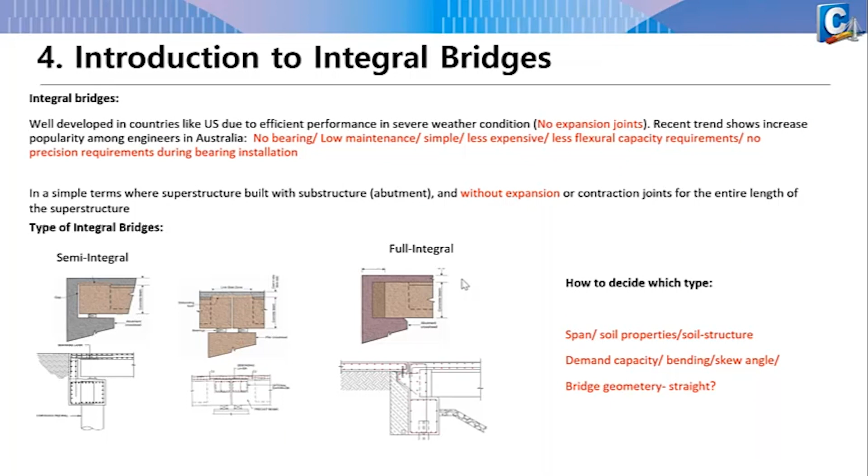And as I explained, provision for thermal movement should be made out of the deck, so there are no expansion joints. As you can see in this figure, for thermal movement joints, the acceptable practice in Australia, basically in Victoria, is to have the joints out of the deck. So it's after the approach slab, between the approach slab and road slab. That's the location which usually can have movement joints.

This is a requirement based on some guidelines. 70 meters is the maximum you can go for concrete. But if I have 70 meters, usually I won't go with the plank. Of course, we go with different types of girders. We can go with the Mega T or the SPGs, but we are not talking about that in this webinar.

And it is very important that you don't have huge thermal cycling movements if you are using fully integral bridges, which means this 20 mm maximum, minus and plus 20, is given in the guidelines, but it's not a must as long as you can accommodate it. But this is a limit to have in your design assumptions, because due to the cyclic movements, you will get different passive and active pressure from the soil, induced from the thermal cyclic displacements.

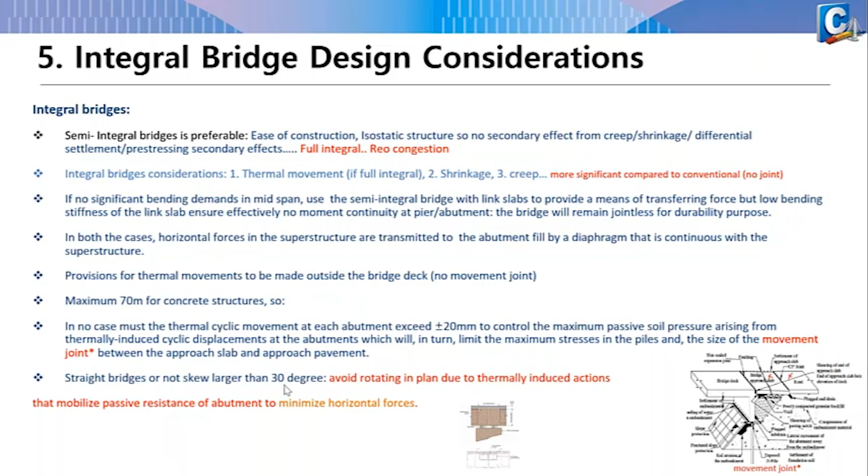So, in summary, when we do a bridge conceptual design, there are factors to pick the solution. Usually in the tender phase, clients ask you to come up with 2-3 solutions before going to the preliminary design. If it's a small project, you do 2-3 options. If it's a big project, probably you do a reference design.

So in the conceptual design, usually you look at the roads: what are the skew degrees and geometry of the roads, the environment, the climate condition there, and also, very important, the soil profile and soil specification.

So the soil profile is one of the key factors. If you have very different soil profiles in two different locations, left and right abutment, south and north abutment, you really get big issues with potential differential settlements from left to right, from the north to south abutments. So you don't want that. Then you should really avoid full integral bridges, and going with the determinate structure is the best option there.

And also the bridge span, as we touched base on, and also the project delivery time in terms of construction time, and then material, and also site constraints. Sometimes you don't have mobilization. What's the traffic there? Do you need a road closure, or what's the maximum span you can close? All of those factors, and then also construction sequencing.

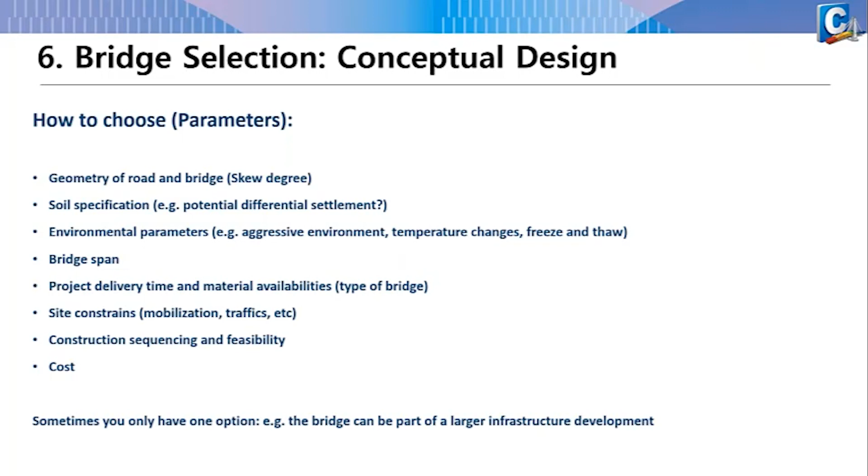So a quick introduction to the project. Now I touched base on the factors in the design phase. So here is the North East Link project, which is basically the biggest Victoria, Melbourne roads infrastructure project. This project is going to deliver twin road tunnels in Melbourne, and a dedicated busway, the first dedicated busway as well. There is going to be 34 kilometers of walking and cycling paths over 16 suburbs.

Our group has been, and is still, undertaking the design of two underground interchanges, cut and cover D-walls, and ramps, which are at Lower Plenty Road interchange and Manningham Road. You can see some of our design phase, which has been completed, and in the next year we finish the CPS phase as well.

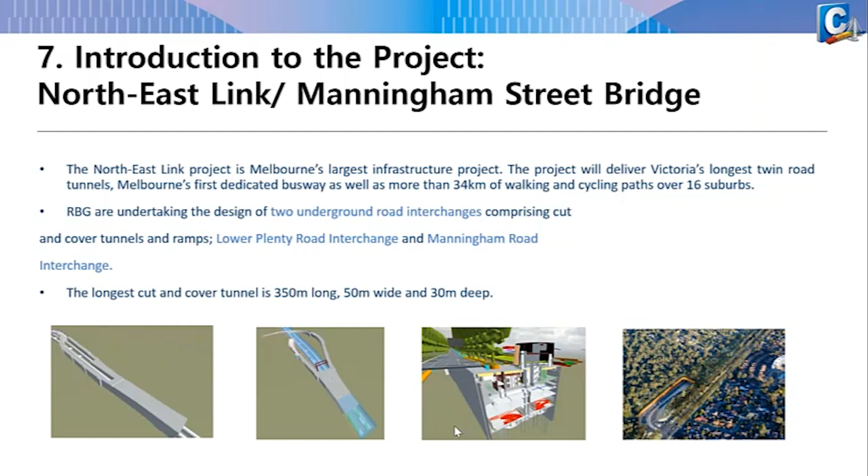So the longest cut and cover tunnel for us was 350 meters long, 50 meters wide and 30 meters deep, with precast vaults. In one of these interchanges, Manningham Road, which you see in the next slide, we have cut and cover, and over the cut and cover walls we had to create a bridge at Bridge Street. And we will talk about that.

Here I'm going to discuss why we decided to go with full integral bridges and why we didn't go with semi-integral bridges. First, we checked the angles. We have probably 15 to 16 degree skew angles, and the 20 meter span perfectly fits integral bridges. And we have a cut and cover D-wall, which has a huge stiffness and creates proper support bedding and abutments for the superstructure, and that can easily transfer bending moments.

We didn't need to worry about the forces at each side of the abutment, so we could reduce the depth of the beam. And also, because there is a road at both side abutments, we needed to keep the finish level of the bridge at a certain road level. So we had no option but to keep that level, and we couldn't change the depth of the beam. So definitely we want to minimize the demand bending moments at midspan.

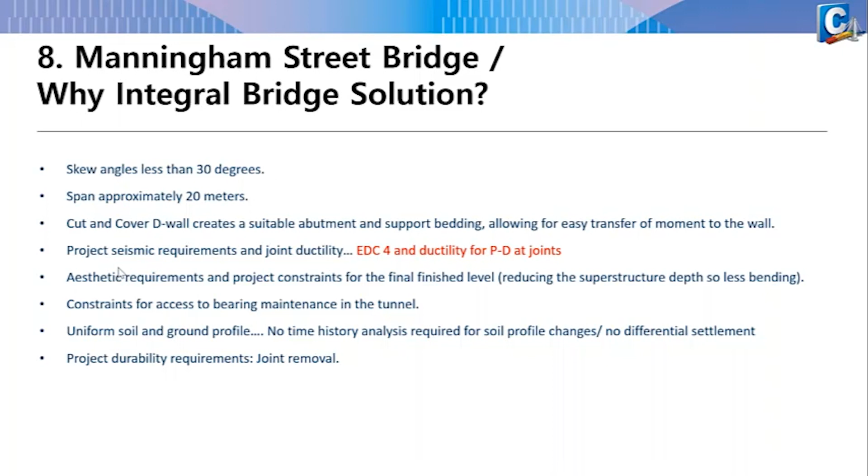You can see in the next slide, that's basically the bridge we are talking about, and it is in the Manningham Bridge Street intersection, and it has 30 meters width, which had 10 lanes, if I'm not mistaken. And in the plan, we have some skew angles. In the vertical angles, we have some angles as well.

And this is basically a cut and cover wall. And that is the approach slab. We designed the approach slab based on requirements, and also the joints happen after the approach slab, as discussed earlier. Basically, this is the solution we adopted. This is a standard plank. Probably most of you are familiar with that.

Usually in Australia, it's very popular to use Super Ts for a longer, like a 30-35 meter span, or like 40 meter max. I think 34-35 meters max for Super T, if you want to go with a standard T1 to T4. And if you have sections with lengths like 12 to 18, 19, 20 meters, if I'm not mistaken, these planks, pre-stressed planks, are super handy.

So you basically have stressed tendons, top and bottom, and they're typical. And you can simply design it, and then also you can decide on the debonding. What is the debonding? Here we used 20 strands, and we needed 2 extra strands and top strands for negative bending moment, and also we needed to create debondings to make sure we don't exceed the compressive and tension stresses in each stage in the construction staging.

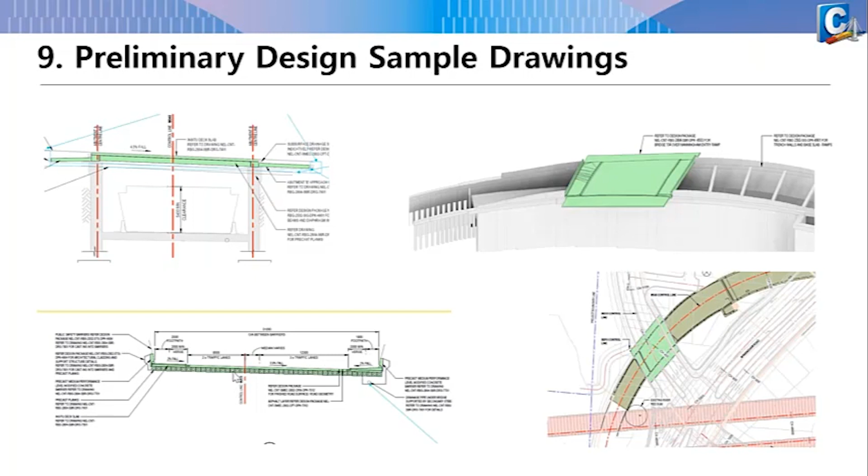So a diaphragm, as you know, creates lateral stability, and the more important factor from a diaphragm is that you get a proper, even vertical load distribution between all your girders. So the diaphragm has a very important role in integral bridge design, and any bridge. So here we basically filled in with grout at the end of the span each side to make sure everything is fully restrained laterally and also create a proper diaphragm.

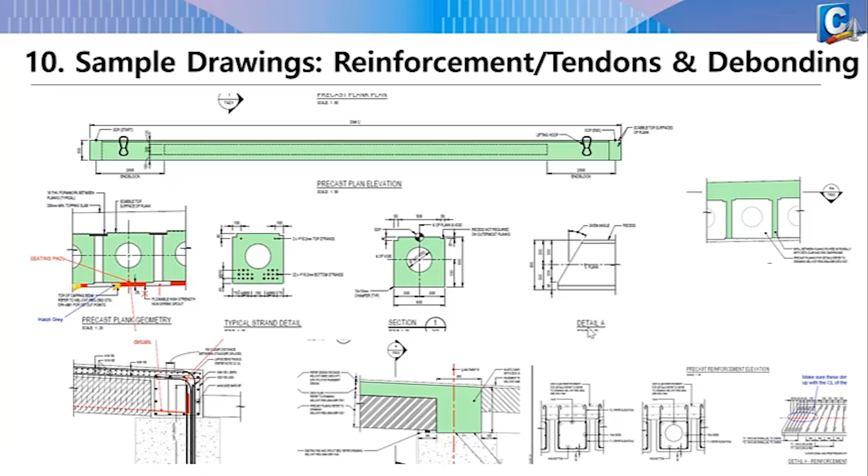So for Midas modeling, now I'm going to highlight the main items in Midas modeling which we used and you can use. I'm very happy with using the Wizard. Usually I use it if I want to do a super straightforward solution, a reference design, or a concept design. It's very easy, fast, everything is ready. In an hour you have your bridge model ready for 1, 2, even 3 spans, and then you can tweak it if you want.

But if the structure is very complex and you need to change everything, then maybe it's not worth it, and you can start modeling from scratch, which is going to be time consuming, but of course there are fewer errors, and you have everything under control. I'm not going to go into detail on how to model that. There are tons of tutorials available, but I'm just talking about what options we have.

And option 3 is basically import. This is my favorite one when I have a properly complicated geometry. And another trick is importing in 2 steps, like what I did for this project. We had the initial concept design in another software. In the detailed design, we really needed to do more sophisticated analysis, and that's why we exported to CAD, and from CAD imported to Midas.

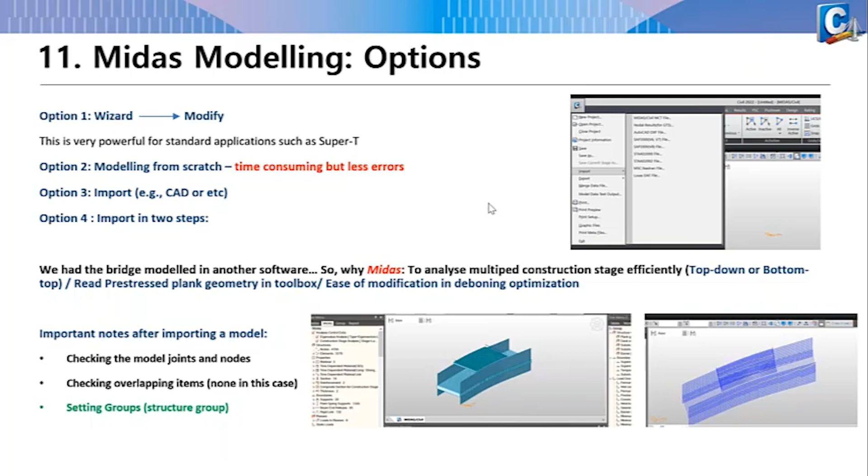You need to create a setting before doing anything. When you import your model, first you start working on creating groups, on structure, on the elements.

And the question is, if we have the bridge model in another software, why did we use Midas? To me, it's very simple. Different software should eventually give you the same result. But we had a very specific case, and it was very interesting and challenging at the time of design. The client was not sure what the construction methodology was. Is it top down or bottom up? That can change the whole design scenario.

So that's why: it's very user friendly in terms of having your construction stages in Midas. That is, I think, the strongest point of the Midas application to me, the construction stage. You can define your construction stages, tweak them, change them, and then have different scenarios. You can create two different scenarios, top and bottom, in different stages.

Another point is that I knew we had the plank geometry ready. The geometry is defined, and you just need to tweak it and do a debonding definition or optimize your debonding. So that's the reason we used Midas, and modeling this was important. When we want to model, regardless of the software, we have a couple of options. Usually we use plate models or beam models, but as simple as possible is the most important thing. And then we have to be objective oriented about what we want to achieve.

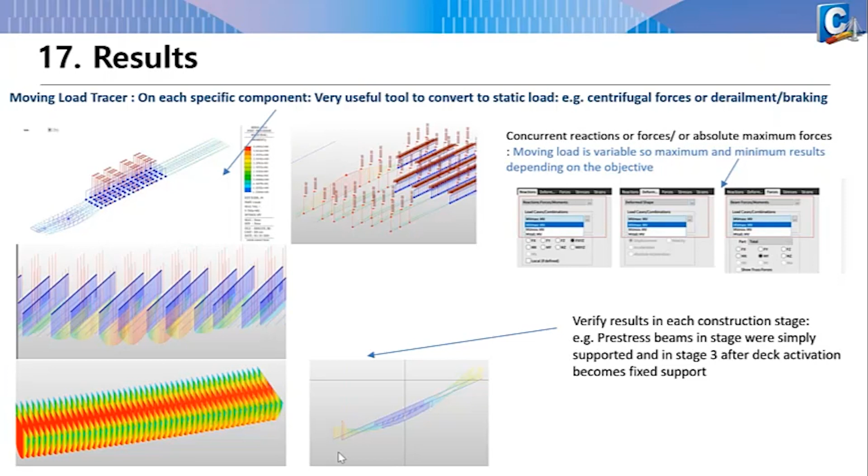The last two slides are dedicated to design requirements. Probably most of you are familiar with them. When we design, serviceability is usually the governing check in most cases. For ULS, we usually define reinforcement and then compare results with hand calculations. These are the most important things I usually check with Midas results.

As I said, every software has modeling, analysis, and design phases. I would say Midas is very handy and a perfect solution for modeling and analysis. For design to Australian standards, it is still under development. If you are designing precast segments, you have every option to design in PSC. If you're designing steel structures, it is under development. But for this, you usually need to check these items.

If you do a PSC design, prestressed concrete design, you go to this section of AS 5100, and everyone knows the crack requirement: 0.25 root f'c. The stress should not exceed that. If it exceeds that level, there are requirements if you have reinforcement. This is the maximum limit. In Midas you can see the results given here. You go to PSC and check all of these items one by one.

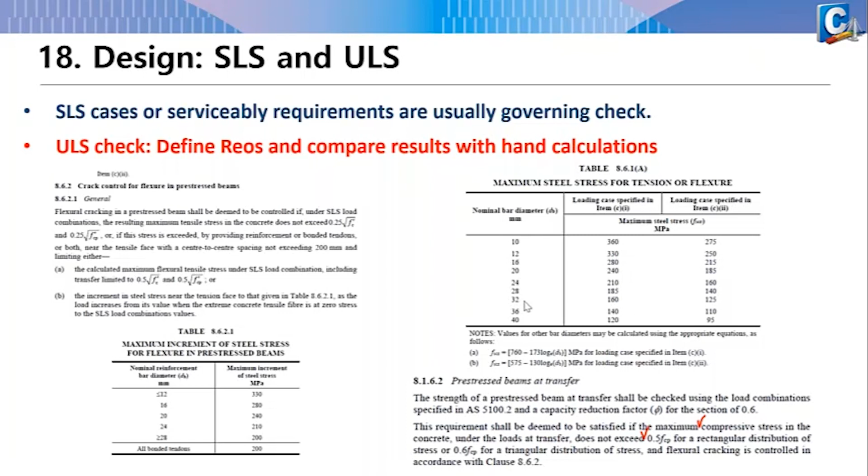So one thing you have to be very careful about is the negative and positive items in the design phase. Midas gives you compression as negative for the results depending on the analysis, but when it's talking about the ultimate design, which is the design items, the tension is negative. For instance, here you can see we were checking the transfer stage at the bottom. So this is checking the allowable stresses and giving you the top.

FT is the top fiber tensile force. You can see here tensile, and then here is the compression. So at the bottom, you have basically these forces. It's bottom compression, and Midas checked it for you. After that, you have to check basically max flexural strength, which is ultimate, shear is ultimate, and then the rest are basically in the SLS check.

One more thing I want to add: you have to go and check your design values in the Excel form. It's a must to check all the design values. Sometimes the software misses giving you the allowable stress. You have to check manually.

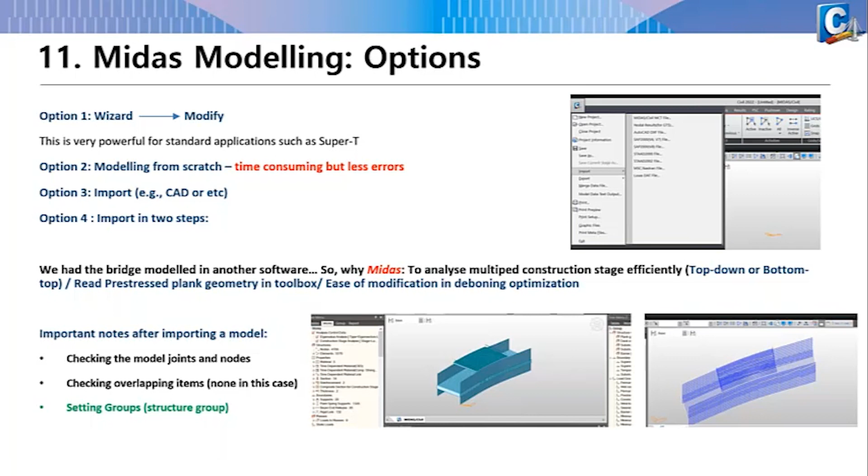Okay, thanks. And the next question is a question by Amiru. He says, can you please elaborate on how you apply the construction load for the abutment back wall, such as earth pressure, etc.? Okay, so yeah, I was a bit faster in the interest of time.

So construction stage, I will explain how to apply it. You can go and basically find the tutorial. So what I understand, you said the load application. So first you have to group your loading. You have to define what are permanent loads and what are the temporary loads, and seismic, whatever loads you want to have in each stage. In fact, if I have 4 stages, those loadings which come in the stages, not in the final stage. And for instance, the moving load doesn't need to be in the construction staging.

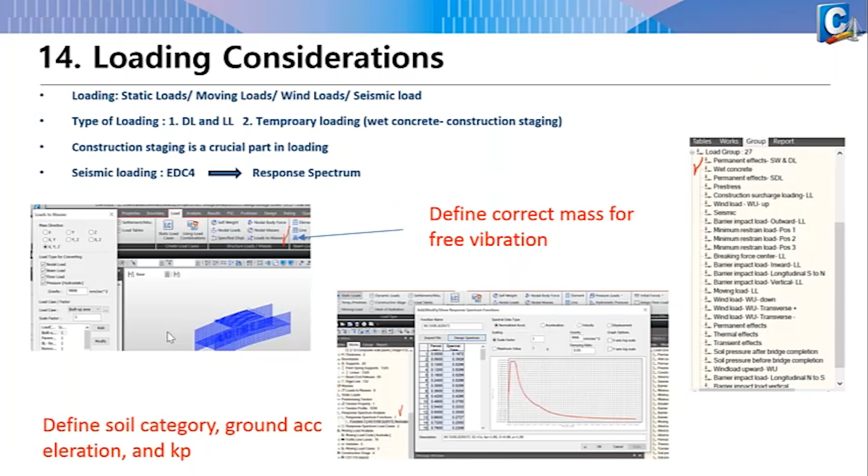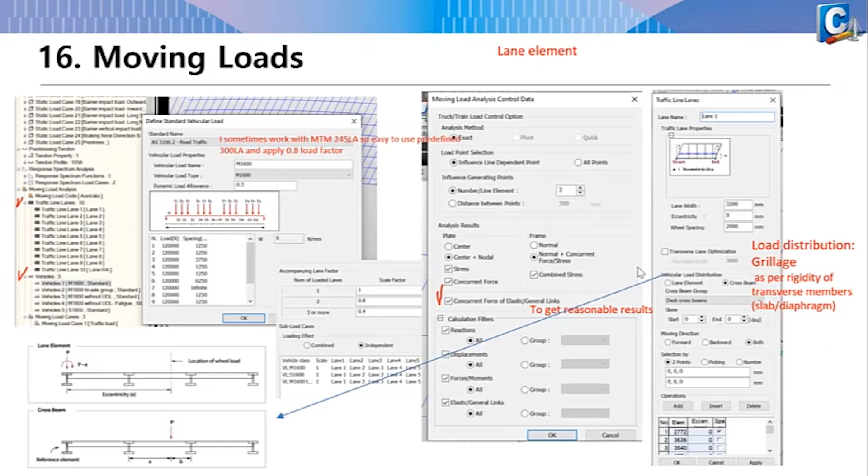So how I apply that, first you have to apply concurrently with your model here. So basically, back to construction stage. So here is the loading. So first you consider, let's say you have bottom to top, right? Let's say in this image, bottom to top. First you have soil pressure and water pressure at 2 sides, right?

And it's a very important point to say, when you do a load combination, you have to create 2 different load combinations for construction staging. One is the favorable, one is basically adverse effects. When you have soil, full integral bridges, you need to create sagging and hogging load cases and then apply the construction stage for each load case.

The reason is that if you have a pressure here, K active, and your K here, your negative bending moment due to the pressure at 2 sides, the sagging moment, the hogging moment at 2 ends, will be reduced because of pressure. So you have to have 0 pressure and you have to have 100% pressure. That's one thing. So the load cases should be divided. This is the first thing everyone should note.

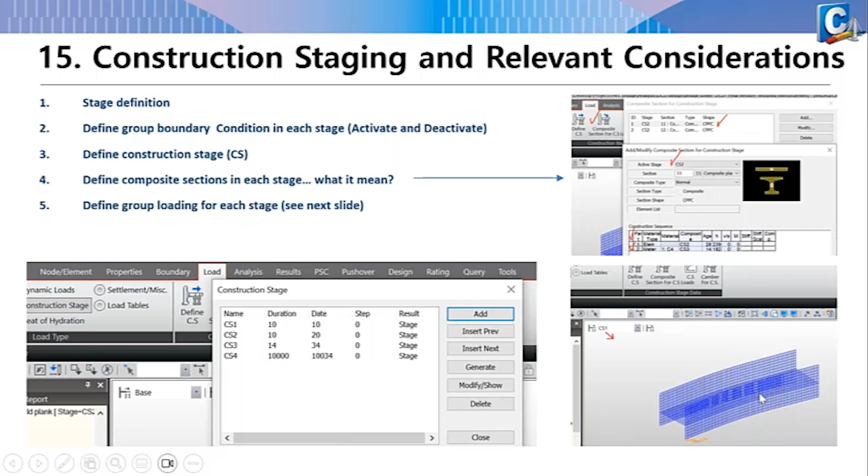Second is you define your loads. You activate your loads as Ka at stage 1. You can see stage 1 here. Then you want to remove that, you deactivate the load and activate the load K0. So that is the way you change your load cases in each case. So here is a stage. In each stage you need to define, and in the next stage you need to remove. So that is a simple way of explaining that. But I hope that's answered the question.

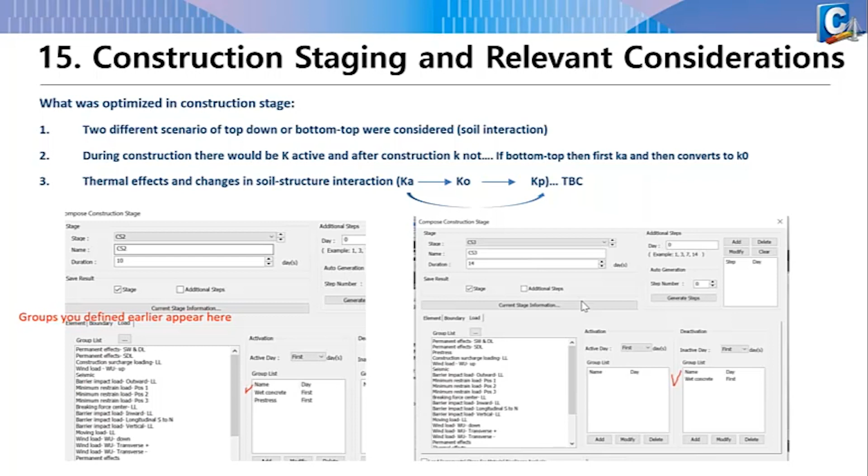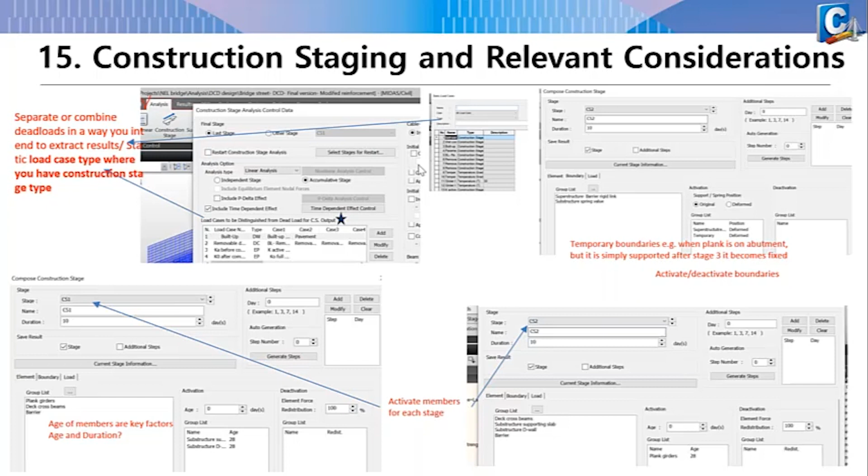Yes, we have checked that, and I had a few things which were not correctly defined. In fact, in my analysis, the creep was correct. But then in my results, as I said here in the last points, I was emphasizing that there are some items which need to be hand checked, especially in the design. So my input data was correct in terms of creep, but in terms of the design numbers, I needed to recheck and also raise it with the Midas team, and then they realized there were some bugs and resolved that. So that's why I was always saying you have to check. But the creep, yes, it was all right.